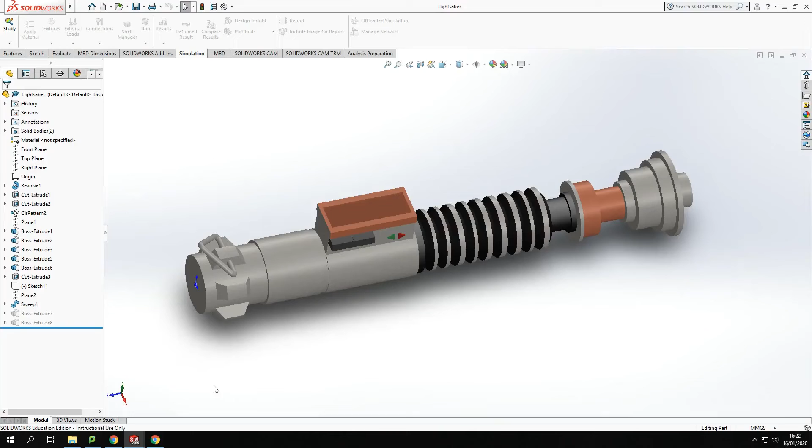So today I decided I'm going to have a go at doing something a little bit fun, something I've been wanting to do for a while. I'm going to model one of Luke Skywalker's lightsaber hilts. This should be a fun exercise - if you want to follow along, it'll teach you how to do it yourself. We'll see how we get on, this might end up being two videos, but we'll plow into it and have a bit of fun.

So let's start off. Now I'm going to try and make this as simple as I can for myself. I've already got some sizes - I've managed to go onto the internet and pinch a few sizes off the internet. We should be able to create something that looks pretty good.

So first of all, I'm going to come onto the front plane and sketch on the front plane. I'm going to do this through a revolve - it should make it a little bit easier for us. So I'm going to get some sizes and start off creating the rough shape.

Now I'm not going to go all the way along, I'm just going to go a long bit at a time. That'll get me far enough. So I'm going to create a rough outline for how I want this to look.

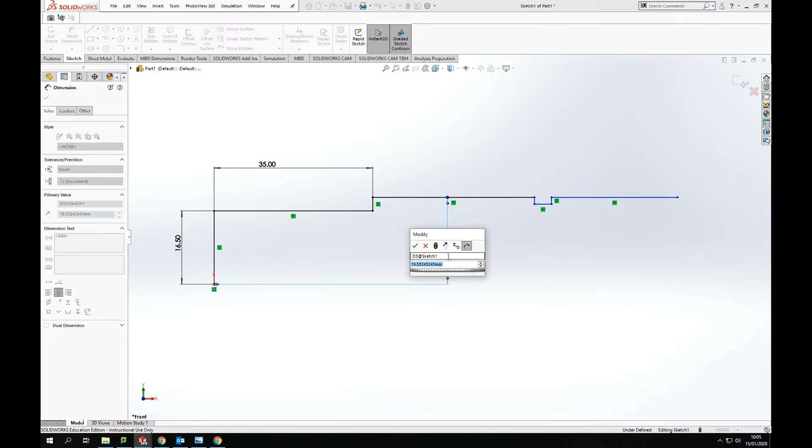So let's get some sizes. Now, dimensions - I've got all these in full diameter, so I'm going to have to break them down into radius. So 33 divided by 2 gives me the half radius for the height, and that is going to go along 35. And then the second radius here is going to be 36, divided by 2, and that'll give me the height for the next section.

And I'm going to make this a little bit easier for myself, and I'm going to put a center line in. So when I do finish it, I will have something to revolve it around. And this lightsaber in full length is going to be 278 millimeters long - it's going to be quite long.

Okay, so keep going along. I'm just going to set some dimensions in here and keep moving along so we've got the sizes. So we've got 31 there. We've got a diameter of 35 here. And a distance of 3. My diameter for this one and the last one are the same size, so I'll just make them horizontal.

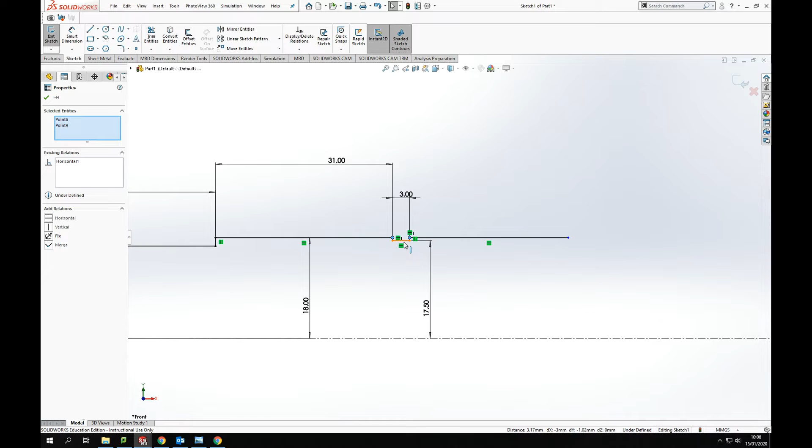With this, then the lines are coming vertical, so let's turn them to vertical lines. Now I'm going to try and draw this fully defined, still following the same principles of what I would do if I was modeling anything else. So this section's 51 long, and then I drop down to a diameter of 34.

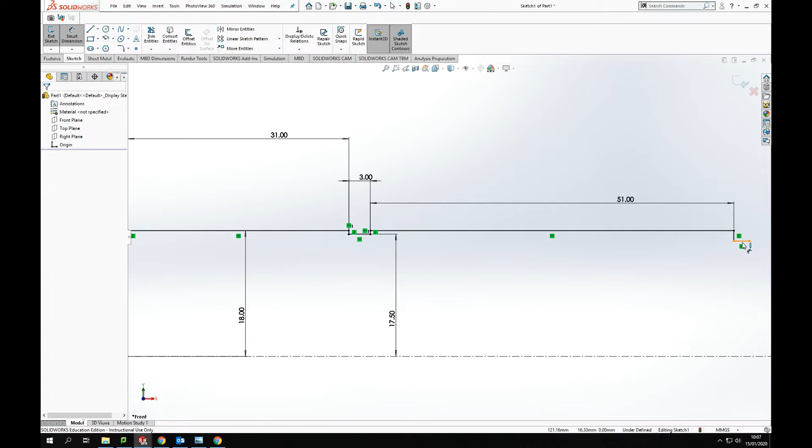Okay. And that bit just sticks out by 6.5, like so. Okay.

Now, as you'll have seen at the beginning of the video, in the thumbnail to start off with, there is a picture of what this is going to look like, and I'll add in a video so you'll have an image of what the final product's going to be like. So you'll have an understanding of the shape. Now, in this middle section here, we've got a stepped section where we're going to create what effectively is part of the grip. So let's have a look at how we're going to do that.

Now, what I'm going to do is I'm going to set up a center line to get the bottom edge. Now, I know this whole section is going to be 70.5 from there. Okay, and the distance down from the top is a diameter of 27.

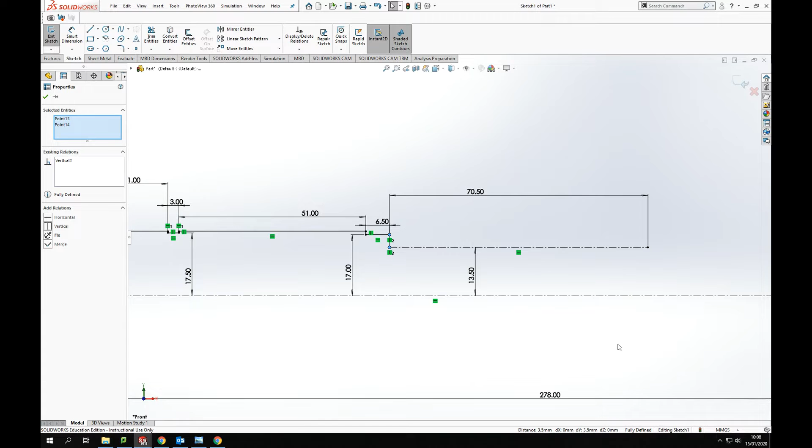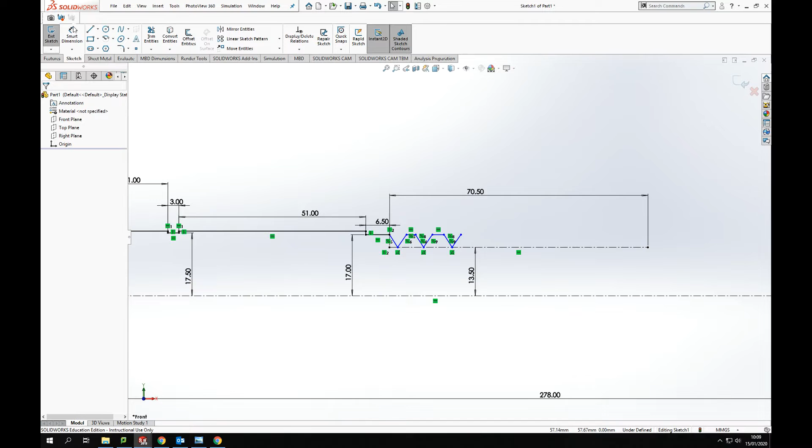Okay, just keep that lined up with that, like so. Okay, so what I'm doing is I'm going to pick the high spots and the low spots as we go along. So from the top here, I'm going to go down and up, across, down and up, across, down and up. And this continues all the way along, but I'm going to start getting some sizes just to make sure we are keeping to the right scale.

So my gap between there is 5. Let's try that again - 5. Okay, and I want to keep them two lines equal. Then my next gap across the top there is 2, and then 5 again. And we can repeat that process all the way across.

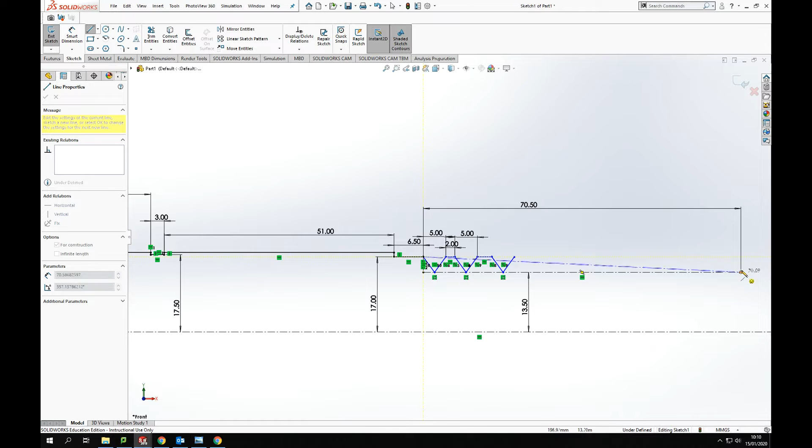Now what I want to also make sure is that this top section stays on line with this diameter at the top here, so I know that I want that to join to there all the way along. Like so. And rather than me keep writing 5 in every time, I am just going to click these and make them equal. Oh, too many.

Okay, so by doing that, it's setting that it's overdefined. So we'll just undo that. It's okay, that's not a problem. We'll just keep using the dimension tool to define that.

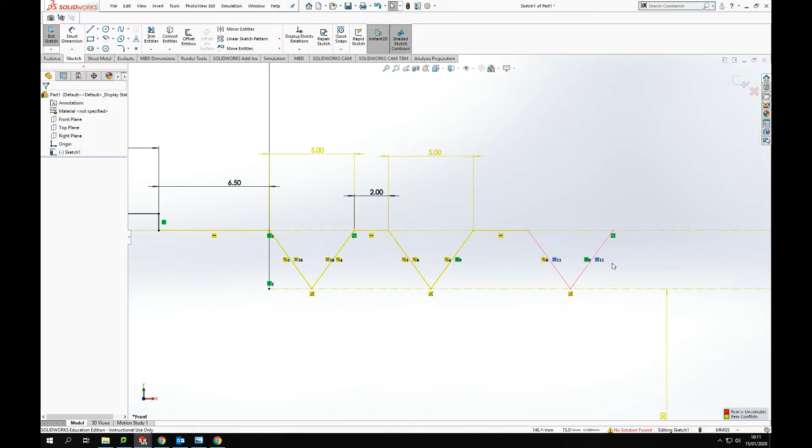Okay, so it's automatically picking up because of the distance that's set between the two construction lines, that is the right size. So those lines should be equal, but it's still picking up that it is overdefined. Not an issue, as I'm working along we'll just check that as we go. Now, the reason at the moment it's not fully defined is because there's no distance set up either side.

So that distance across there should be 2 again. And then we can come across and down and up and across. So we are going to be setting this distance now as a 3. And again, continuing our gap between the two.

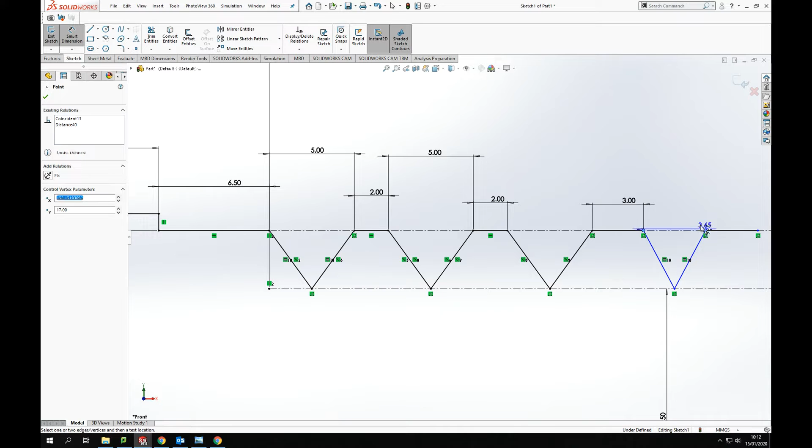And I want that 5 mil. Okay, so we've done 2, 2, 3, and now we're on to another 2 milli gap in the middle here. And continue to follow this process along.

Okay, so again, continuing along, putting in sizes. So 5 milli. 3 milli, 3 milli, and again 3 milli.

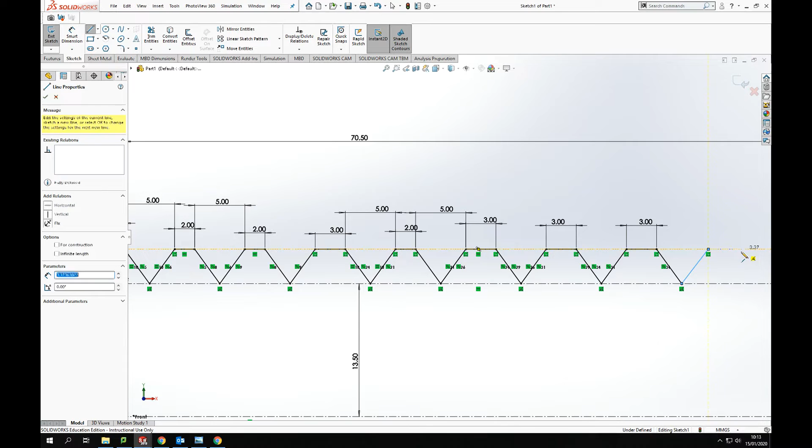Okay, so we should be left now with 2 and a 3, with a 5 milli gap in there, and a 5 milli gap in there, like so. So that is our grip along the outside of the shaft.

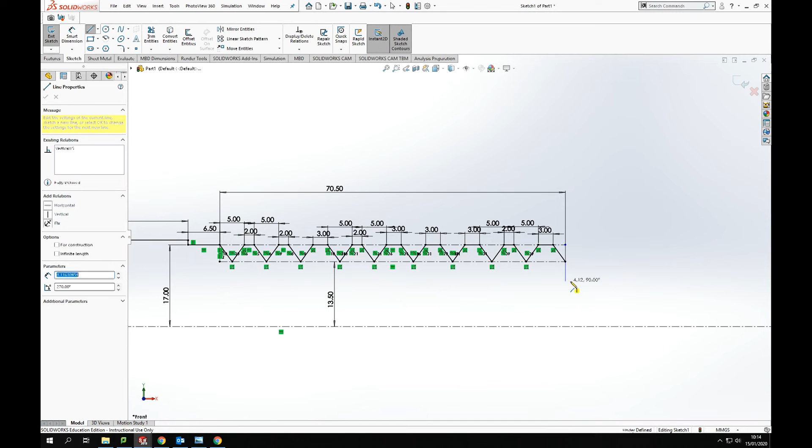Now from that point, we're going to come down and across, and we're going to start creating the top shape for this lightsaber hilt.

Okay, so let's get some sizes to this bit now. I like to section this a bit rather than drawing all the lines out, because it'll just get a bit too complicated if we try to draw everything out in one go. And then when we try to dimension it up, it comes to a point where it just gets really messy, and trying to figure out what's what just gets a bit too complicated.

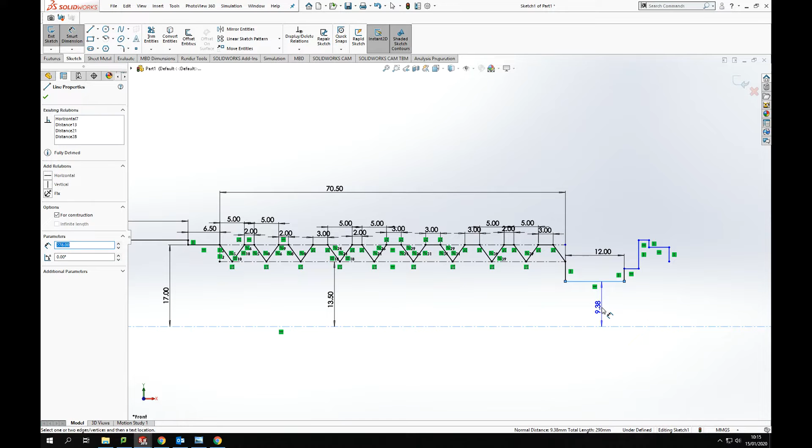So this bit is 9, and then we go up to 22 diameter, so 11, and goes across 3 mil.

And again, like I say, we're just moving along, keep building up with our dimensions, making sure everything's to the correct size. And we will get to a point where we get to the end and everything should be perfect to scale.

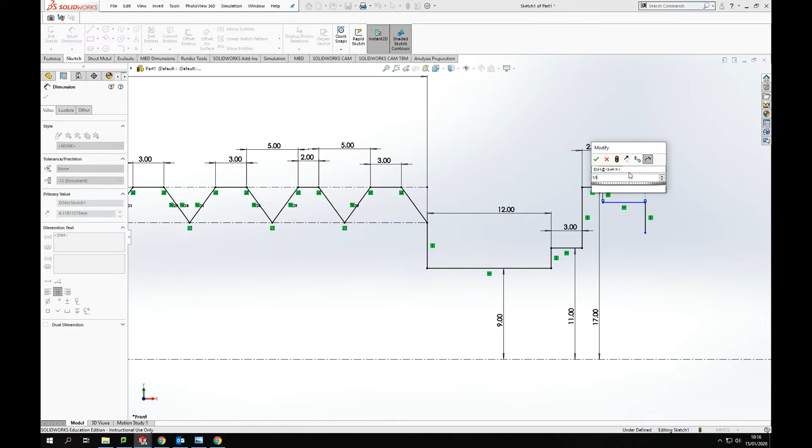Now, this lightsaber that we're looking at modeling here is the one from Return of the Jedi. So for those of you who are big Star Wars fans, you will know exactly what this looks like, and you will be really interested in having a go at modeling this. For those of you who aren't as big Star Wars fans, it's still going to be a good bit of fun to have a go at modeling this. Something that is out of a movie is always good to have a go at. You can see actually how they've gone around designing it in the first place for the movie.

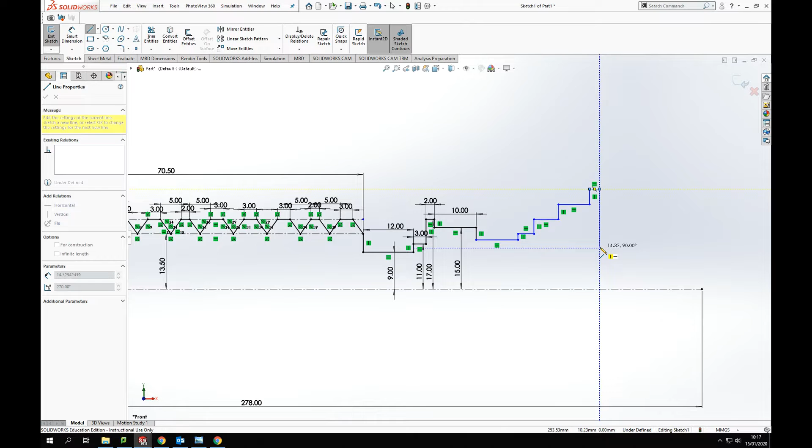Okay, so we're nearly down to that final bit now. We're just finishing off with these final sizes. So we've got a diameter on the end there of 19 divided by 2, and we've got a distance coming down of 10. We have a diameter out to the outer edge of 47, and a distance going along there of 3.

So this isn't an over-complex design. Those of varying levels of ability on SolidWorks shouldn't have much of a problem with this, because it is a simple revolve. The most complex part really is just going through the whole process of dimensioning it up. And again, it's quite easy to make a mistake while you're doing that, because there are lots and lots of dimensions. I'm trying my best here to keep this as neat as possible. Doesn't always work out, but we'll hopefully make a good job of it by the end.

Sorry, wrong size on that. That should have been 40, divide by 2 is 20. And then this section is 33 divided by 2, and we're going to get the distance across there of 13.

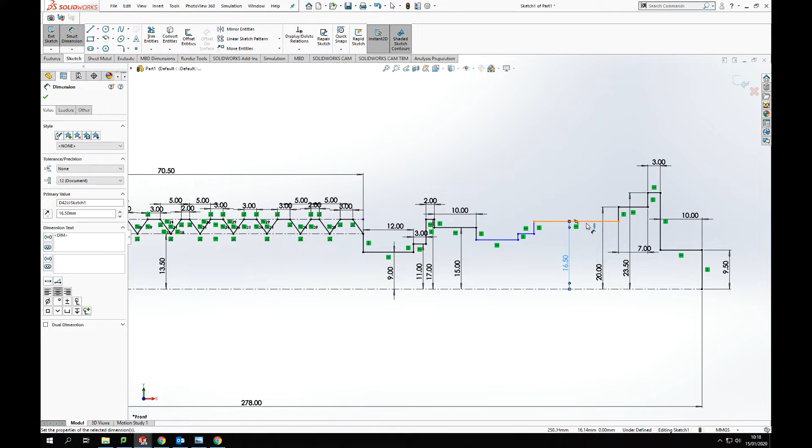Nearly there now. So this last section is 5 across. And we are 23 diameter. And 18 here.

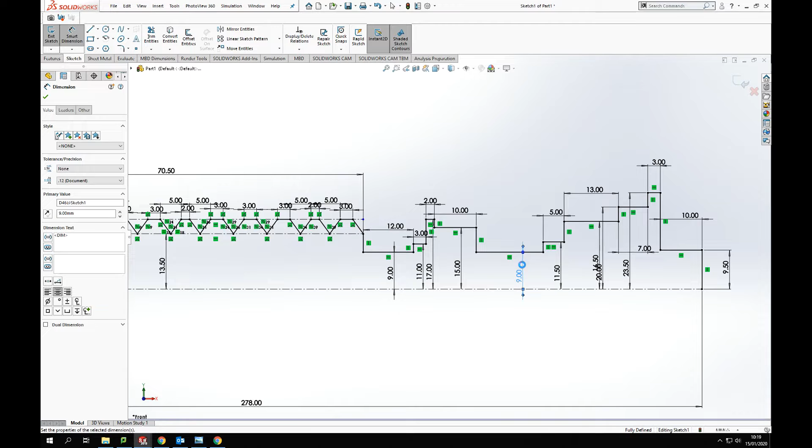Okay, so we've now got the outer shape of that lightsaber, the full shape all the way along. Now that looks really messy and complicated, but it's not that bad, as long as we go through it step by step with our dimensions and relationships.

From there, to turn that into a model, we're going to go up to features and revolve that around this center line. Just click in there, and we get that lovely lightsaber shape. Now there's a bit missing off the bottom, a bit of a hilt missing here, so we're going to add that in.

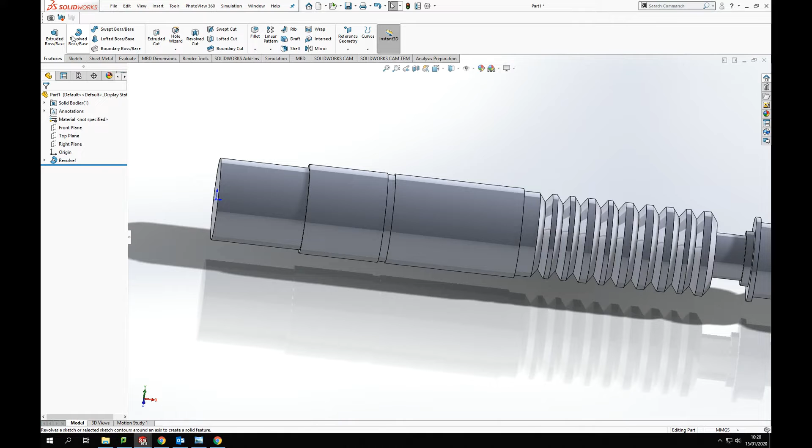The easiest way of adding that is to create the shape itself and then revolve the pattern round. So what I want to know is how far along that shape is going to be. I need to set a plane from this outside edge, and I am going to set it 25 mil in, flip the direction, and put that there.

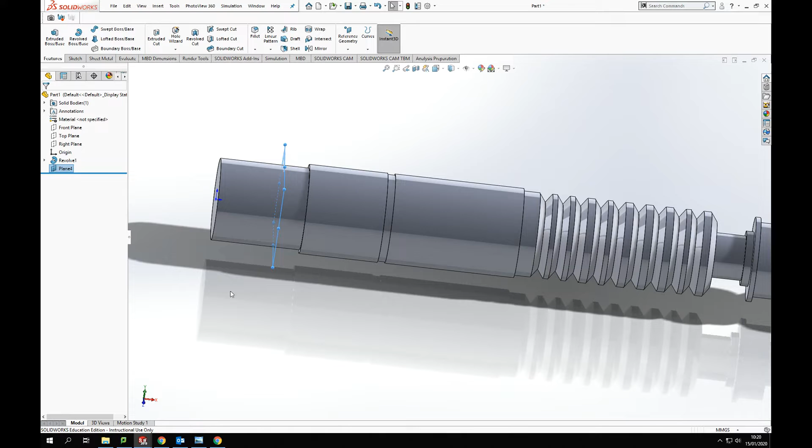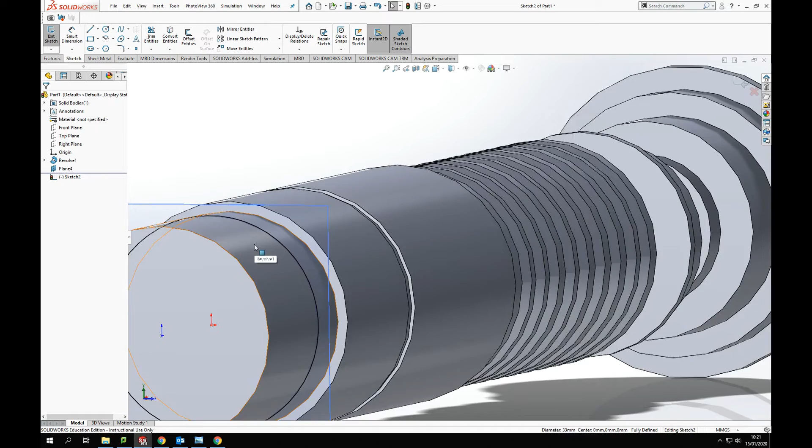So on that plane, if I go normal to it, I'm going to sketch one of the bits on the end of the hilt—they stick up a little bit. The way to do that is to put on here the circle diameters so we go from our back circle here and convert the entity onto a sketch on there. So if I click my plane, sketch on that, click the circle on the end, I'll convert entities to create a circle there.

Now, from that circle, let's flip normal to first, so I get a better view of what I'm doing. So now I've got this circle, what I want to do is create a circle above that, 6 milli higher. Get the circle tool, come out, and I'm going to create a 6 milli difference between the two circles.

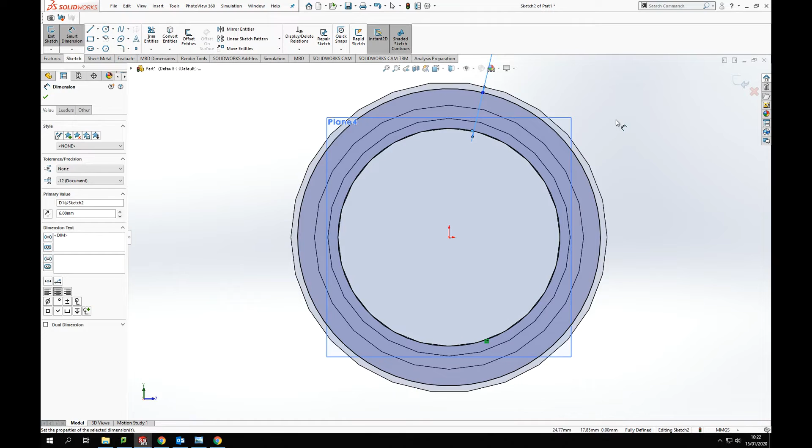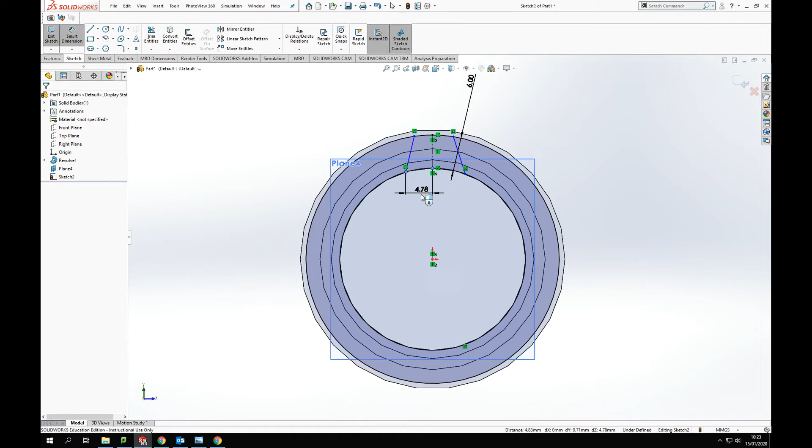Once I've got that difference between the two, I can start to sketch the shaping. So I'm going to draw a center line between the two circles, and sketch a line diagonally here and here. Now I know I want a 10 milli gap at the bottom, so that's going to come 5 out, and that's going to come 5 out. The same at the top, but not 10, this is going to be 8, so this one's going to come 4 out, and this one is going to come 4 out.

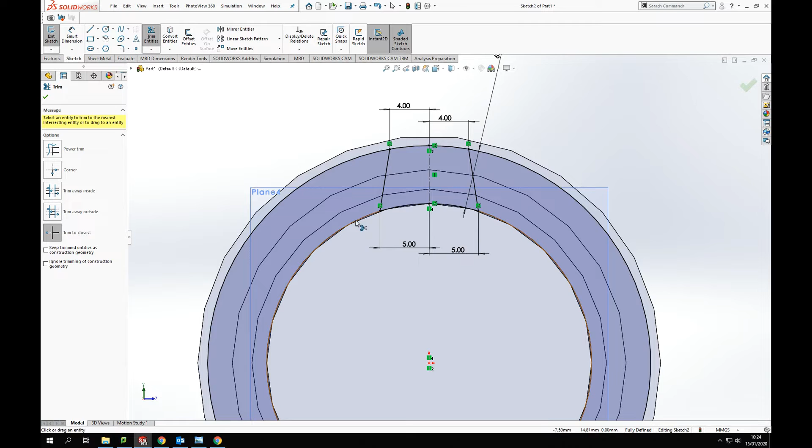Okay, so we've created that shape. I'm going to get rid of the bits I don't need, so I'm going to trim off the excess—these circles around the outside. Then from there, I've got my shape. I'm going to extrude that, so features, extrude, and extrude that shape, and I want to go 19 milli to there.

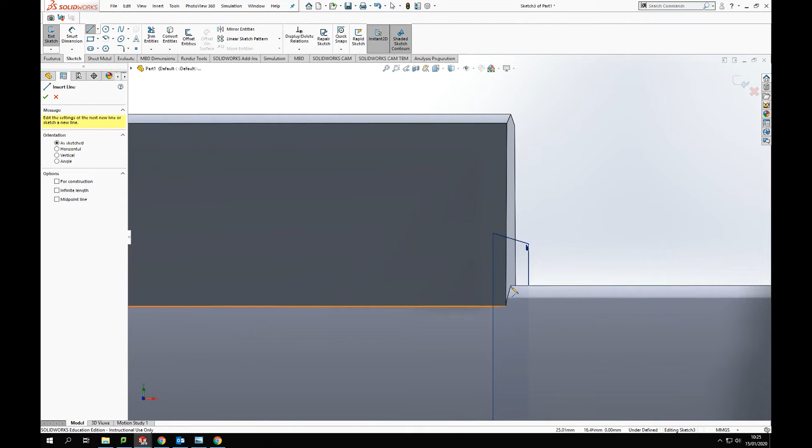Now, I've got that shape, but it does angle in, so I am also going to create the angle for that as well. If I come to my front plane, I'm going to go normal to that plane and sketch on that plane. Move right in, and I'm going to draw a line from this center point here, up to the top, out to the edge, and down to the bottom again.

Now this triangle is going to come 4 in from that end. I'm going to do the same on the other side, so rather than drawing that again, I'll find a center point there, like so, and I'm going to mirror that across.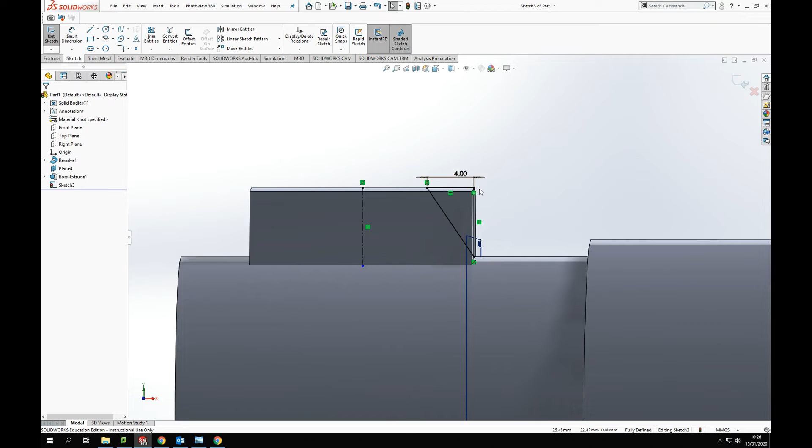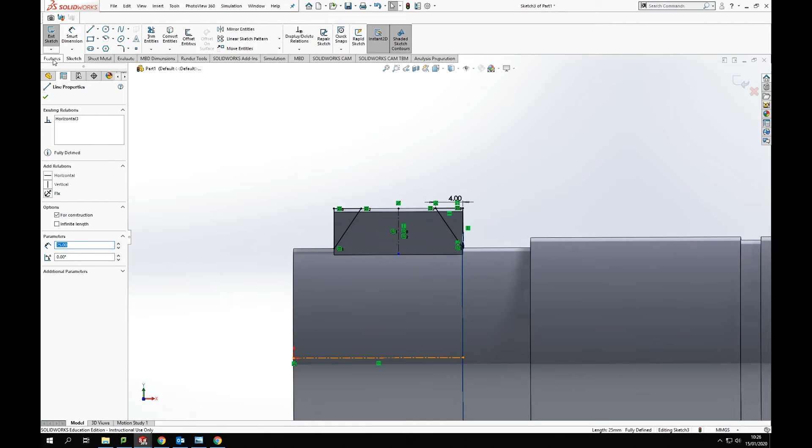Okay, so I need that to sweep around that shape just to get rid of it in a circular motion. So I'm going to draw another center line from the origin along there. Click that center line, and I'm now going to go to features and revolve cut, and revolve cut that around the outside, giving me the shape of that end piece.

Now once I've got that, I can pattern that shape. So I go to pattern—I don't want linear, I want circular pattern. I'm going to pattern that around that circle there. I want 6 of them, all the way around, 360 degrees, equally spaced. That's perfect, and tick there. Okay, so that's that end.

The next bit we're going to do is put a hole through one of the end pieces on here. So I'm going to use this top one.

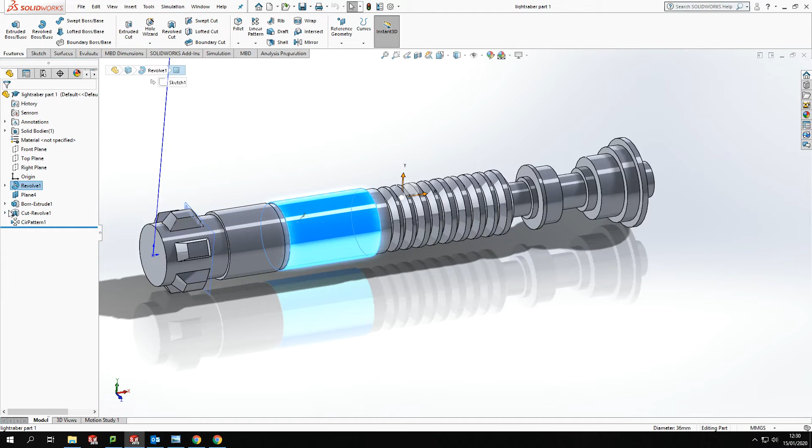So if I go to my front plane, I'm going to sketch on that front plane, and I'm going to go normal to that front plane. Zoom straight in. I want a hole to go through there halfway.

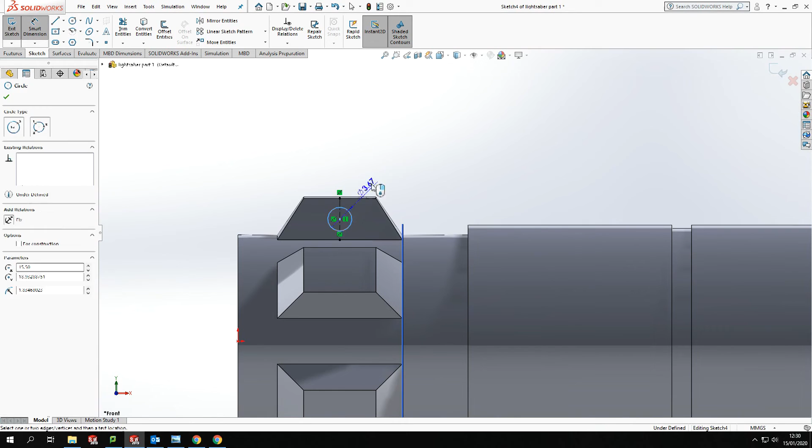So I'm going to draw a center line from the top down to the bottom. I'm going to circle and put a circle in there. Now this hole is going to be 3.1 mil.

And I am going to cut that through the center of there. So I'm going to go mid-plane, and I'm going to go both ways through. You should see it stick out of either side, like so. Okay, I could have selected up to surface, but I've only done it one way, so mid-plane allows me to go cut both ways at once.

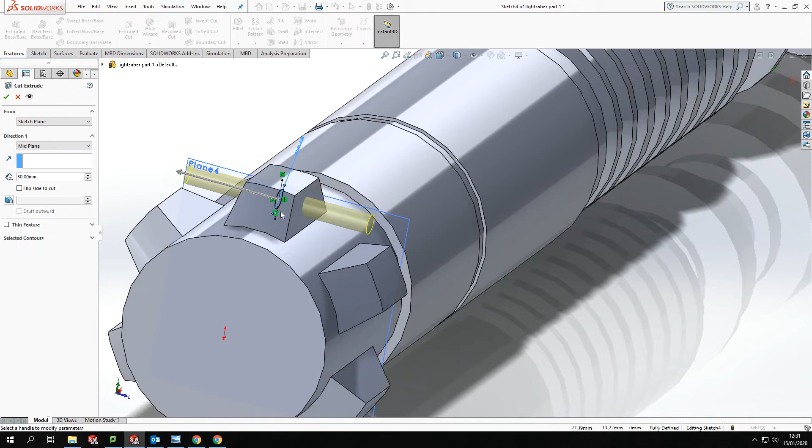Tick there, and we've got the hole through the end of that. Now, the next piece we need to complete is the battery pack area and the buttons on the section above here. So what I'm going to do is from the top plane, I'm going to offset a plane.

I'm going to set that to 30 high, like so. Now it's 30 high. From there, I am going to make this into, so I'm going to go normal to that, look straight down on top, and I'm going to make a box here.

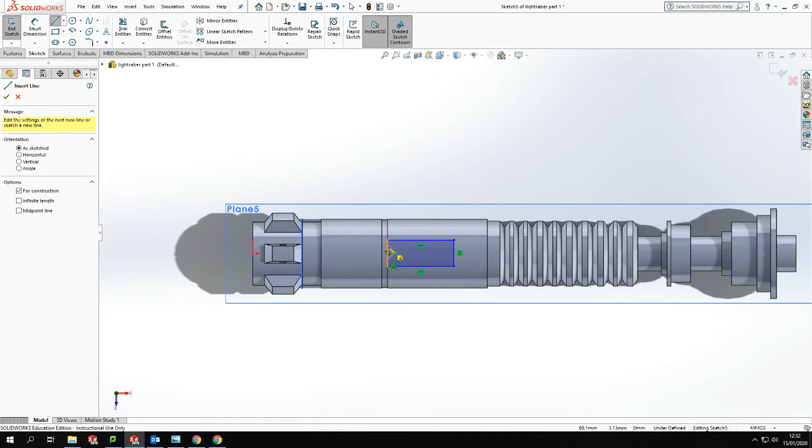So that box, I'm going to use a rectangle, and I'm going to use a corner rectangle, and the box is going to sit right there. Now I've not set any sizes to this, I've not even set the center, so let's set the center first. Okay, now pick up the center there, straight across, zoom right in, make sure it's picking up the same center, like so. Now I want to connect that point to the center of there, make them coincident.

What that means now is if I extend it out one way to one side, both sides will extend out the same from the midpoint. So I want that box to be 19 millimeters wide. Okay, and 49 long. No, sorry, not 49 long. 46 long.

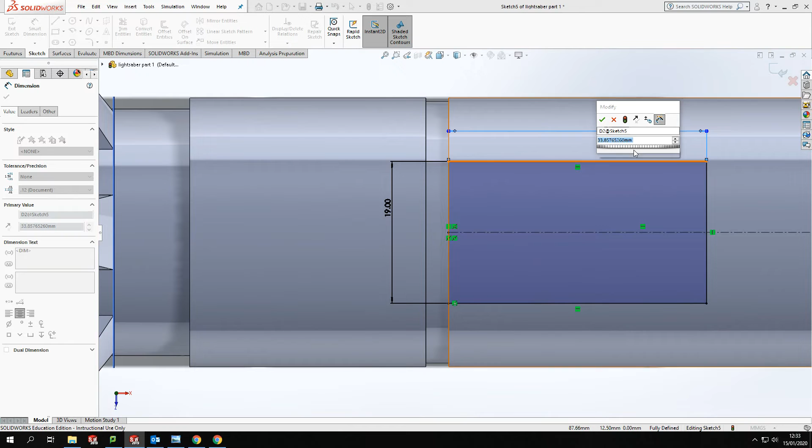Like so. Okay, and I'm going to offset another box from that one, and I'm going to set it to 5 mil. Okay, and I'm going to go inside. Sorry, not 5 mil, 2.5 mil. I want it to be 2.5 in from each end.

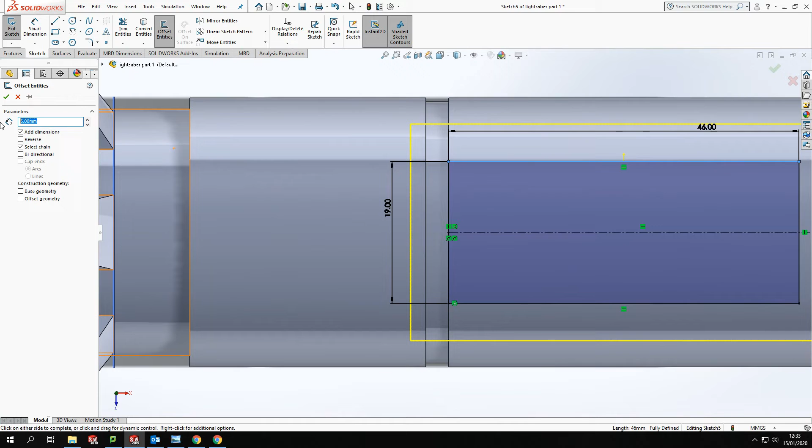So I'm going to offset that 2.5, and I'm going to come in. That's better. That's what I want. Okay, so 2.5 mil in either end, and I'm going to extrude that down to the bottom.

So I'm going to go up to surface, and I'm going to click this surface here. It'll extrude down to the surface of that and tick there. Okay, so now I've got that.

What I would like to do next is create a rim on the outside on each edge. So I'm going to sketch on top of that profile. And I'm going to put a center line in. There to there. And I'm going to draw a corner rectangle.

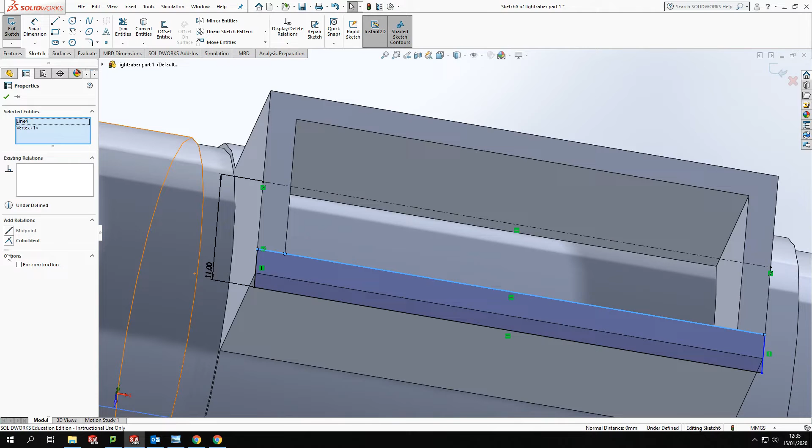And I go from there right down here. Okay, so that is going to stick out from the center to the edge by 11 and go the full length. That point and that are going to be coincident, and that should set up that shape. We just need to make sure we're getting the same on the edge.

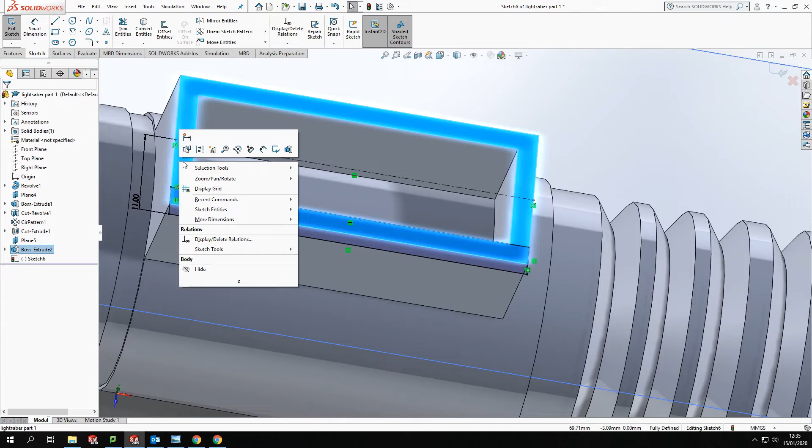Now the distance across, so I want that point and that point to be coincident. So it's just going to line up the outside. I'm then going to mirror that across. So I'm going to mirror that sketch. Let's go normal to that face. So I'm going to mirror this sketch across that center line. So we've got it on the top as well.

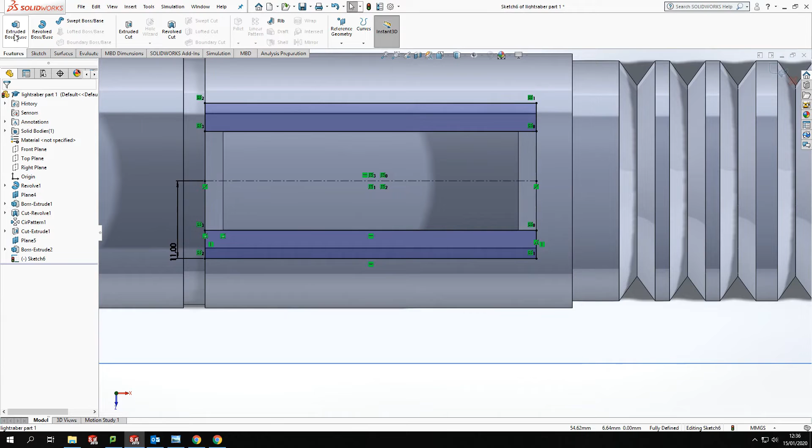Okay. And then from there, I'm going to extrude that up. And I'm going to extrude that up by 5. Just 5 in there. Like so. Giving me an outer edge.

Now, what I want to do is create a sort of stepped section that fits in this gap here. So the way I can do that, I'm going to sketch on one profile edge there. And so that I can see it nicely, I'm going to split this right down the center. Where are we? That one there. Okay, so split this right down the center, and I'm going to sketch on this profile here.

So if I click on that face, go normal to, zoom in, and I'm going to sketch on there. And starting from this bottom corner here, like so. Now what I'm after is creating a step that is going to be 2.5 each time.

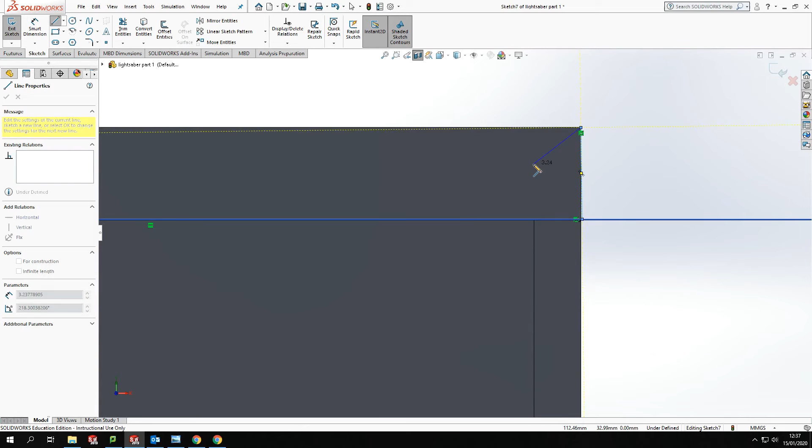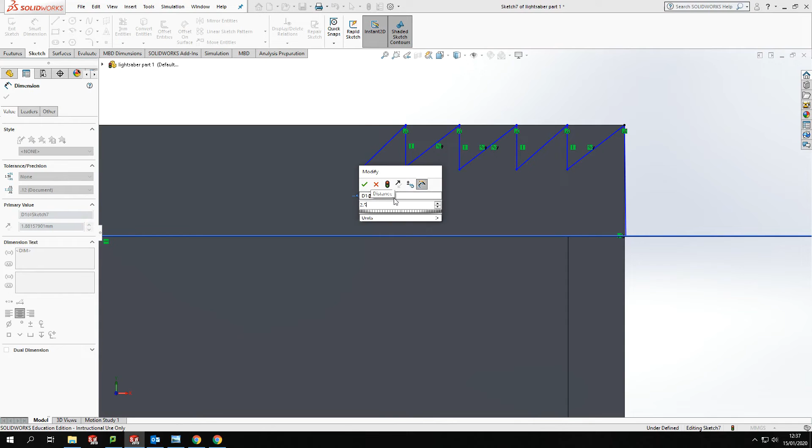So we're effectively clicking like a zigzag each way, all the way along. All the way along there. Now this is going to be 2.5 across. And what I also want to make sure is that we are working from 2.5 milli, which is halfway down. So I'm going to make all of these coincident with this.

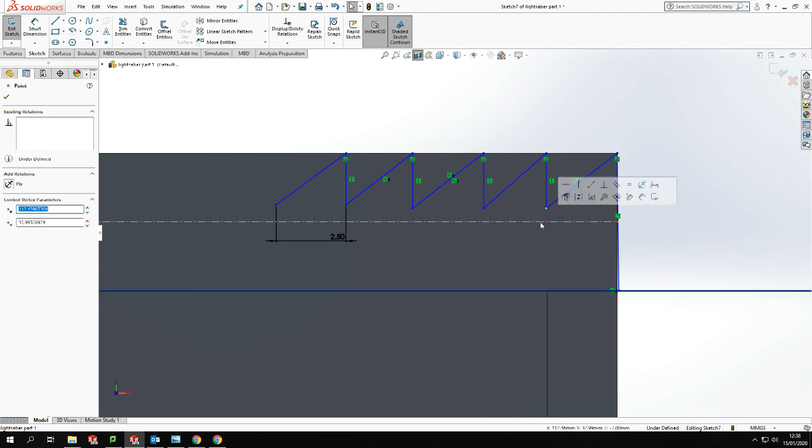So, coincident. And the last one. Okay, so just pull that back into shape, and then we're just going to get the distances across here.

2.5. That's fine. And the last one there should come up at 2.5. So we've got those distances in.

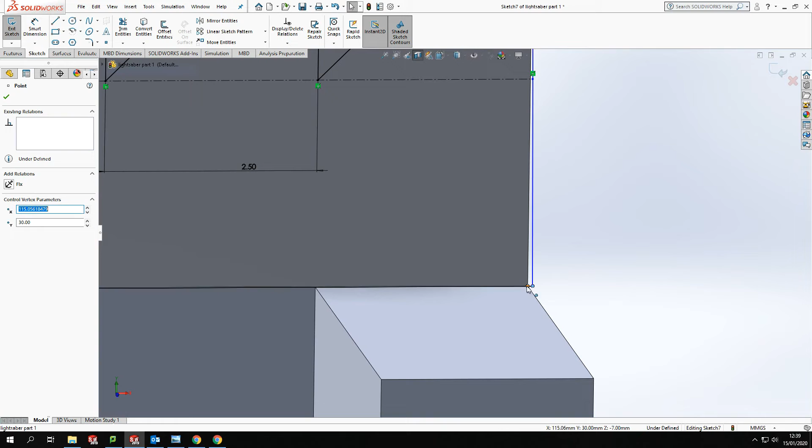Just going to make sure that lines up with that bottom corner. Pull that back into place. Okay, so continue to sketch this. And we're coming along all the way using that same distance.

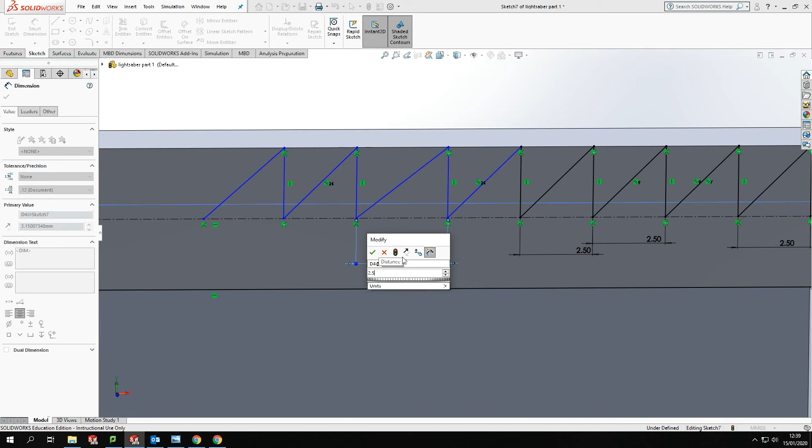Check the distances, so that's 2.5. 2.5. And 2.5.

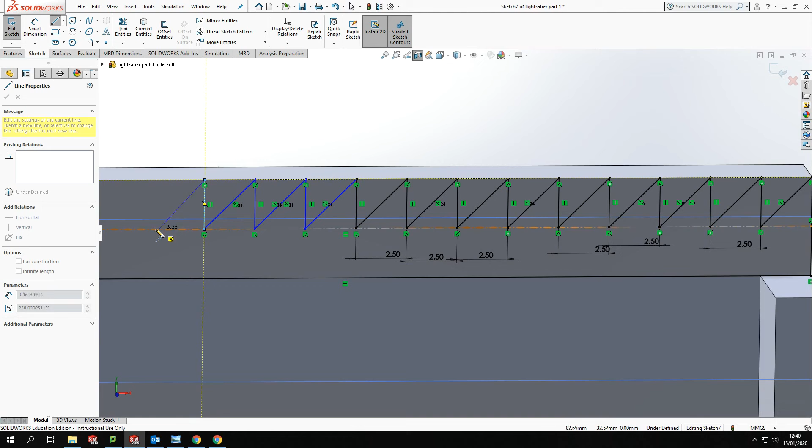Keep coming across. So we're taking this profile all the way up to the edge. And we should now be able to dimension that up.

2.5 all the way along. Now what we've ended up here is one slightly shorter than the rest, so I'm just going to flatten that end bit off.

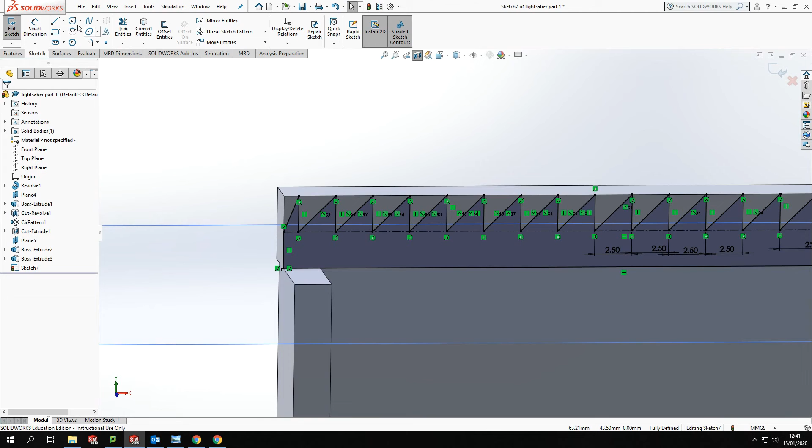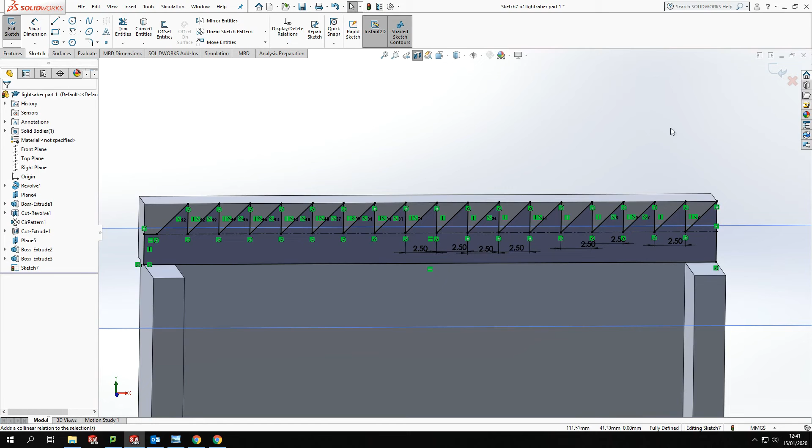To finish that profile, all I'm doing here is working from the sizes that have been given from the pictures that I've got off the internet. So we'll just make any tiny little alterations that need to be made as we go. I'll just flatten that end off rather than having a little spiky extra bit on the end. Now I've got that feature, I'm going to come out of my section view.

And I'm going to extrude that across. So, features, extrude. And I'm going to make that go up to surface, select this surface here, and tick there. And then we've got that all the way across. Okay.

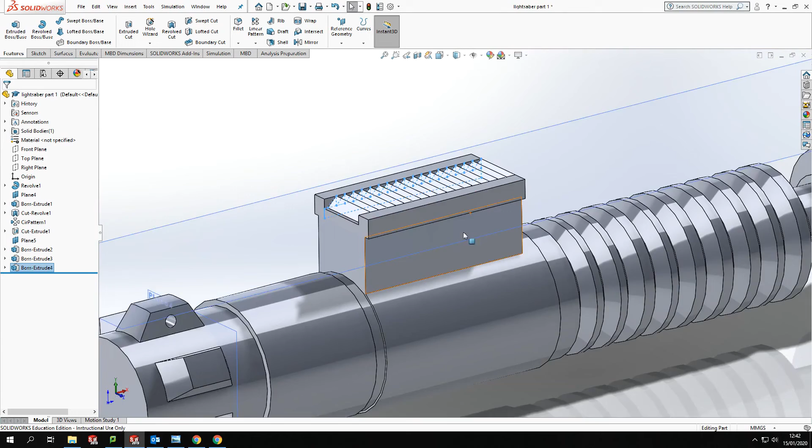Last part then for this section of the model is to put our buttons on. So from down to here, I'm going to sketch on that side plate, and I am going to create some buttons.

All right, I think I've edited the sketch there, so let's sketch on that side, and I'm going to turn normal to that face. Okay, and I'm going to put in my buttons. There, okay, so I've got two buttons here.

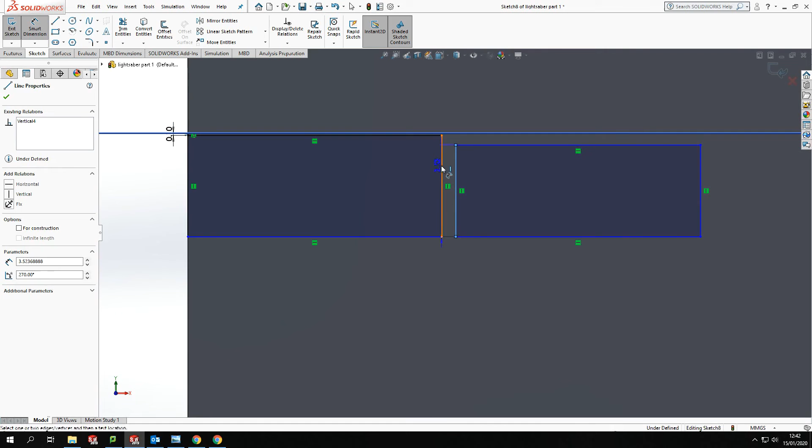I'm just going to offset them slightly from the face above, so I'm going to go 0.1. And I'm going to take a 0.1 gap between them as well. Okay.

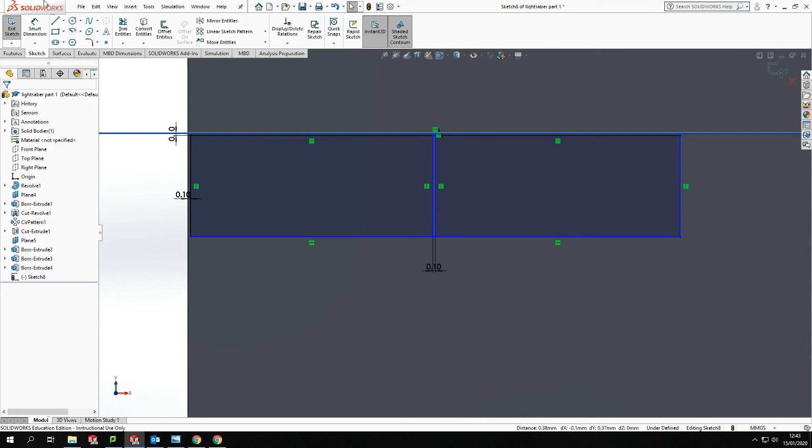Now with that as well, I'm just going to move that edge in, into 0.1 as well. Like so. If I line them two points up horizontal, like so, the distances that I'm after is 5 down the side and 12 across. I'm repeating that for both.

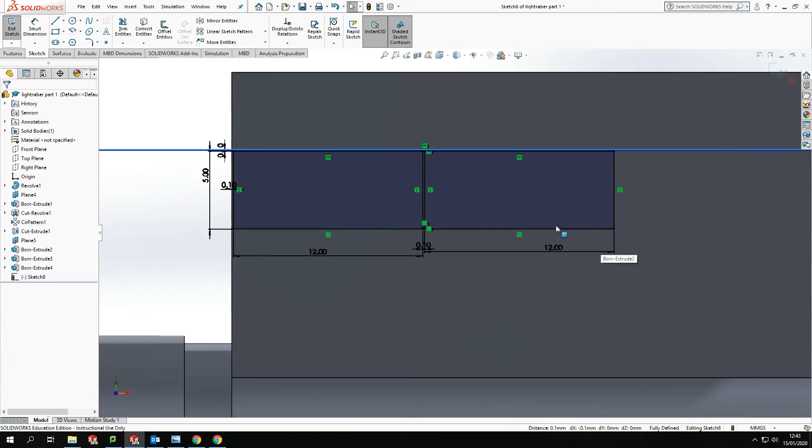Like so. And once I've got that, what I can do is extrude them out, making sure the bottom there is level. So features, extrude, and I'm coming out 6 mil. Like so. So we've got the buttons on the side.

Then my last little bit is to put on my 2 lights at the side here as well. So I'm zooming again, I'm going to sketch on that face again. So I'm sketching, and I'm going to put 2 triangles in.

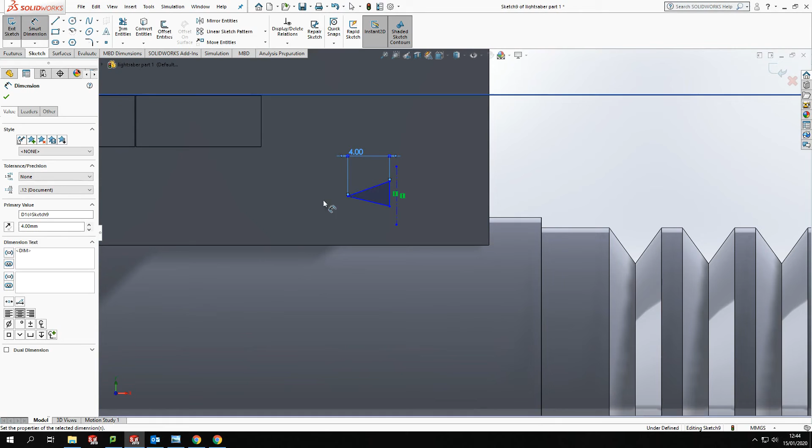Like so, so one there. I'm going to draw a center line in there, and put the other one in. Put the sizes on this, and I'll mirror it across. So 4 and 4.

I want that to go down there. I want that to be in line with the center of there, so I'm just going to make that coincide to the midpoint. I'm going to set a distance between the two of 1 mil, and I'm going to mirror that across.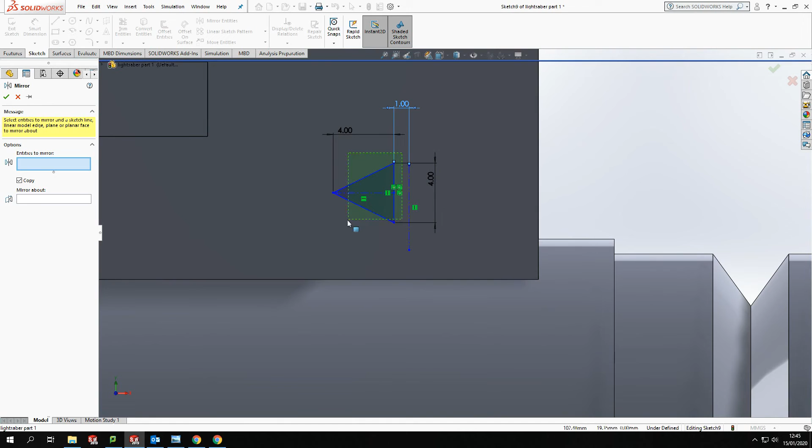I'm going to mirror that sketch across that line there, across that line there, and we'll get the second triangle in there.

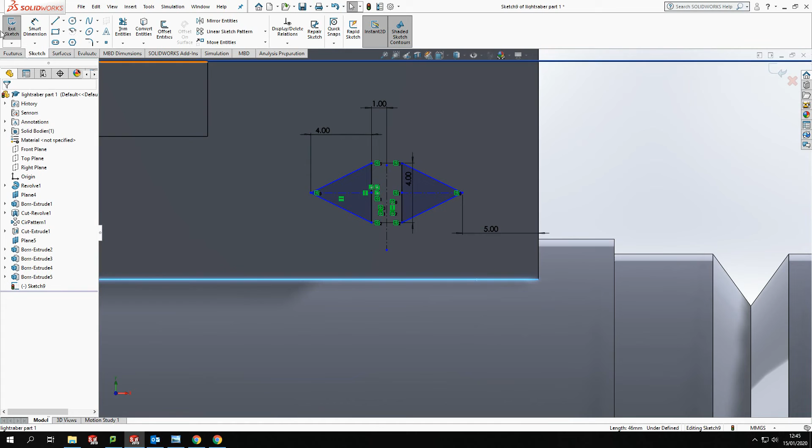Okay, then what I want to do is set up some distances so that that to there is going to be 5 mil, and from that to there, from that corner to there, is also going to be 5 mil. So we define the position of the 2 lights. Features, extrude that, and I'm going to come out 1 mil, just so it sticks out a little bit.

And we've got the position of our 2 lights on there. So the last part to doing the lightsaber is to put effectively a hook through the hole at the end here. We've done that main section with the buttons, lights, and battery pack on top, so we've pretty much got the full shape now. We've just got this last little bit to do.

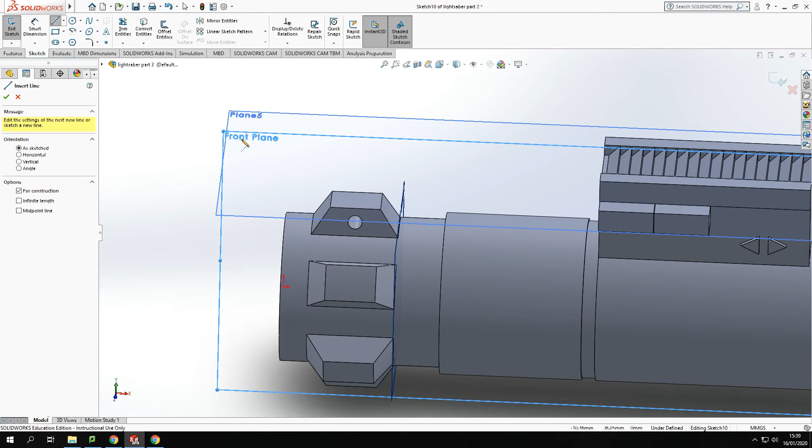What I'm going to do is put a plane on here, which I'm going to connect the hook to. So I'm going to draw a center line sketch on the front plane, from the center part of that circle, just roughly, it doesn't matter what angle it's at, it's just so I can set a plane that makes the hook look like it's in the right place. There's no specific point where this can be, in fact it should have free range of motion, so I'm just going to put it into there.

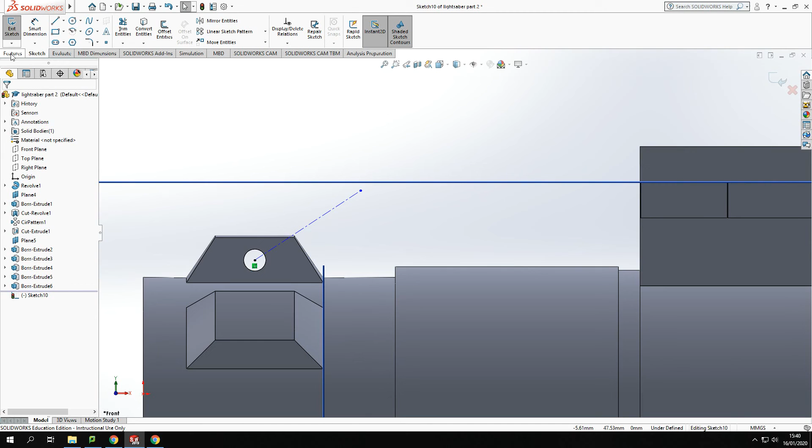Now, to create a plane on the end here, I'm going to put my plane coming horizontal across. I'll go to Features, to Reference Geometry, and grab the plane. I'm going to use this line and the end point so that it's perpendicular to that line, tick there, and it should let me put the plane in like so.

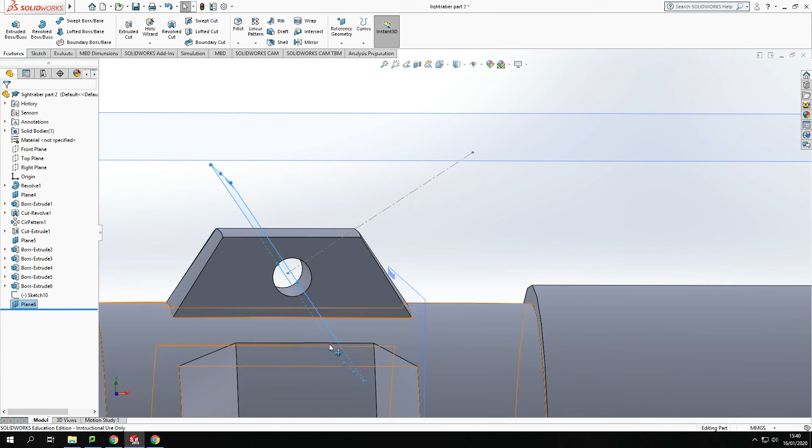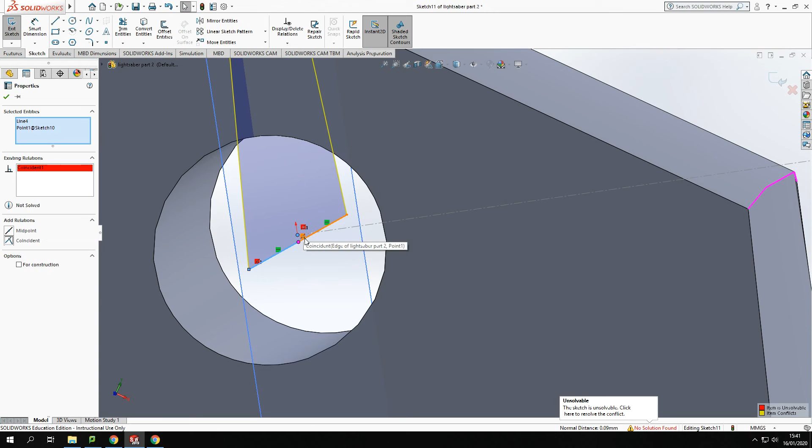On that plane I'm going to sketch the triangle-shaped hook. Using plane 6, I'll sketch, go to normal to, and create a triangle. That triangle is going to come out, come up here, down here, and connect back together, like so. That should be going through the center of that circle. Let's make sure we've got that all connected up, like so.

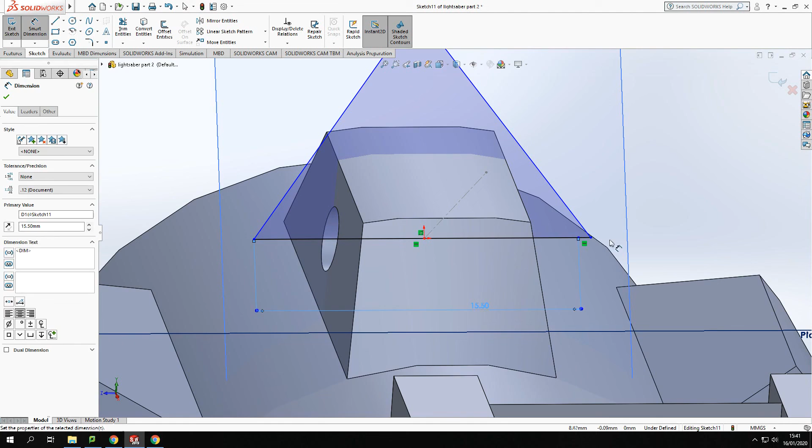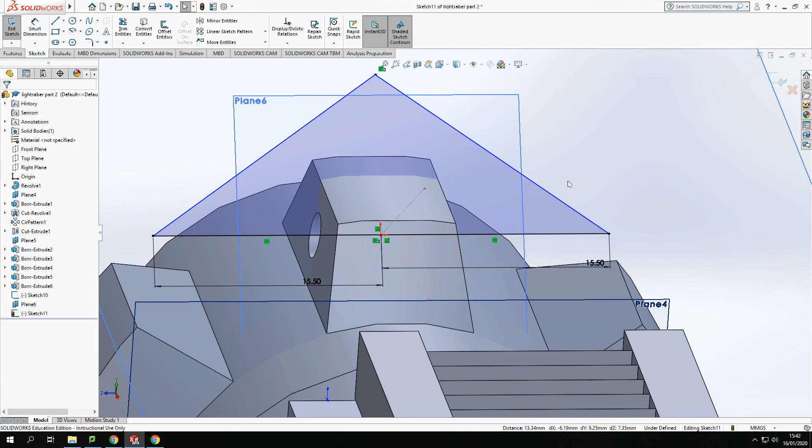Now we just need to add some sizes to this. The triangle across the bottom is going to be 31. So 15.5 out that way, 15.5 out that way, and 15.5 out the other way as well. I want that point and that point to be horizontal, like so. Then I want to get the distance from the top down to the bottom, out to the side, and that should be 19, up the side there. So we've got that triangle shape.

Now what I'm going to do is round off these corners, so I'll put a fillet on the end of these corners. It's not going to be 10, let's say 2 on each corner, like so. Okay, now I've got that shape, that's going to be my guide to sweep a circle around.

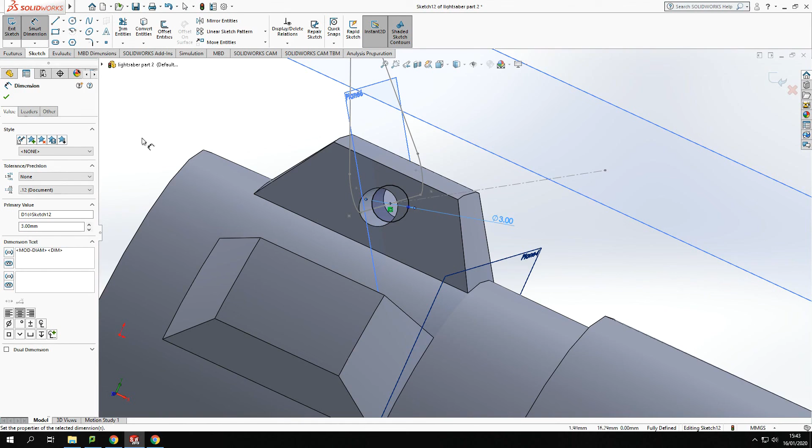So if I come into here and draw on that front plane, I'm going to sketch a circle that is going to be a diameter of 3 mil. That should just give it a little bit of freedom of movement in there, so if I was to 3D print this, there would be a gap, so that would move.

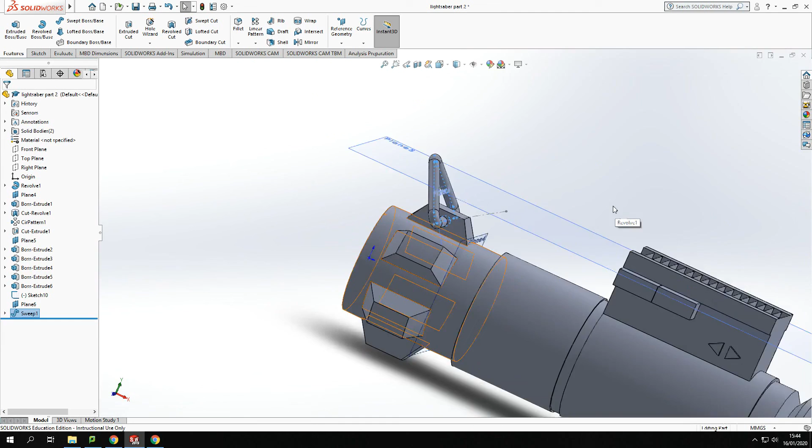Now I'm going to sweep that around, Features, Sweep, and sweep it around that sketch, around that profile. I'll tick there, like so, just to give us that profile on the end. Now, just so it's easy to see what's happened, I'm going to hide these extra planes, and I'll hide that too, so you can see the model a bit better.

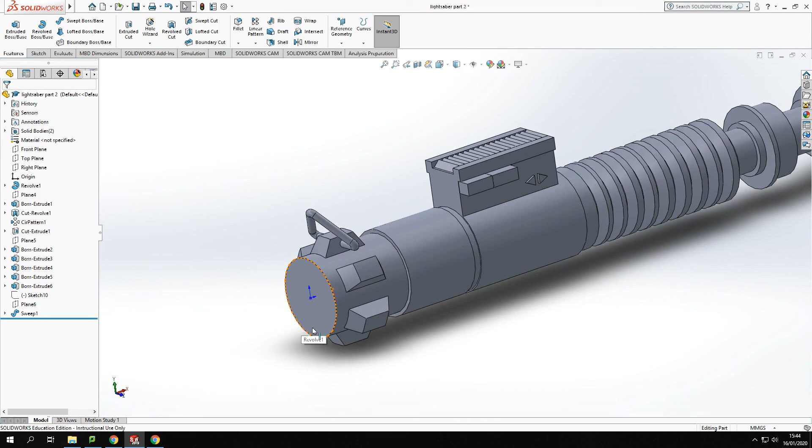So that's our lightsaber modeled up, all in one model. Now, from there, if we wanted to, we could render it and give it a really nice finish so it looks realistic. So what I'm going to do in the next video is go through the process of rendering this lightsaber.

Excuse me. So hopefully you enjoyed that, hopefully that's taught you a few new little tricks, and just something fun really to have a go at. Like you say, SolidWorks doesn't always have to be used for modeling proper engineering components all the time. It can be used just for creating some nice models, something a bit more fun, something a bit more friendly, just having a go at and learning a few new techniques.